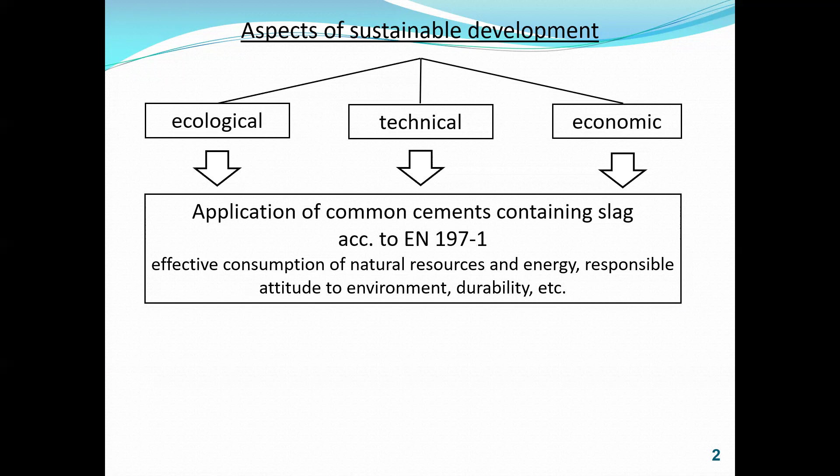The actuality of common cements containing slag implementation is due to their conformity with ecological, economic, and technical aspects of sustainable development concerning efficient consumption of raw materials and energy resources, responsible attitude to the ecology of the environment, durability, etc. The main problem of using common cements containing slag is slowed hydration processes and, as a result, lost early compressive strength. The best solution for activating such cements is alkaline activation.

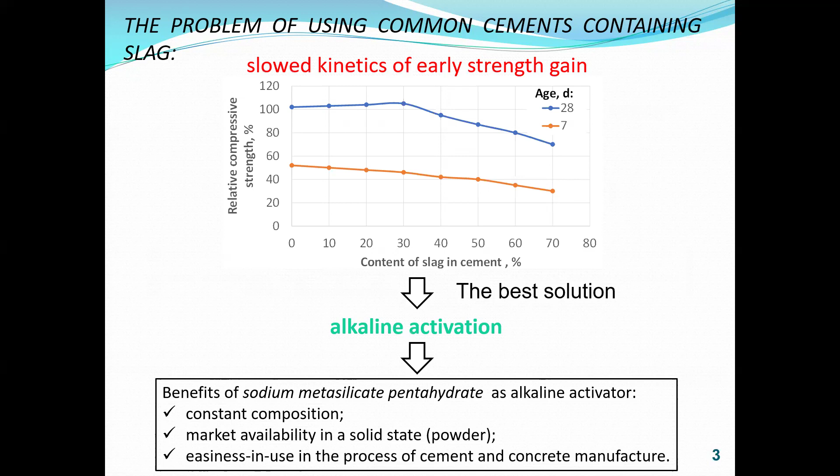Sodium silicates, the anions of which are similar to hydrated initial products of destruction of the alumina-silica-oxygen framework and serve as their additional reserve, are found to be the most effective alkaline activators. The best solution is the use of sodium metasilicate pentahydrate due to its constant composition, market availability in a solid state, and easiness in use in the process of cement and concrete manufacturing. Increased slag content in cement systems and alkaline activation provide formation of more preferable hydration products, cause high strength gain and durability.

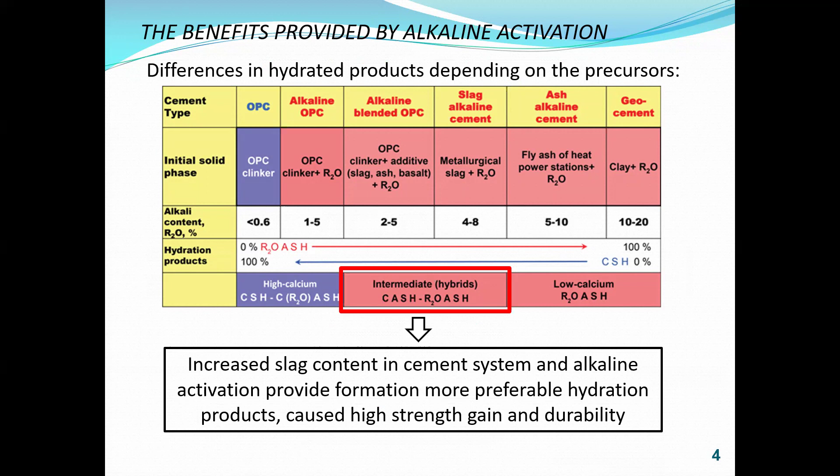The main obstacle in using the alkali-activated common cements containing slag made with sodium metasilicate is a quick setting. The use of setting retarder, effective in alkali-activated cements, for example, sodium lignosulfonate, can be a way to control their structure formation processes. So, the aim of the study was to discover an approach to control the structure formation in alkali-activated common cements containing slag through alkali activation with the help of sodium metasilicate.

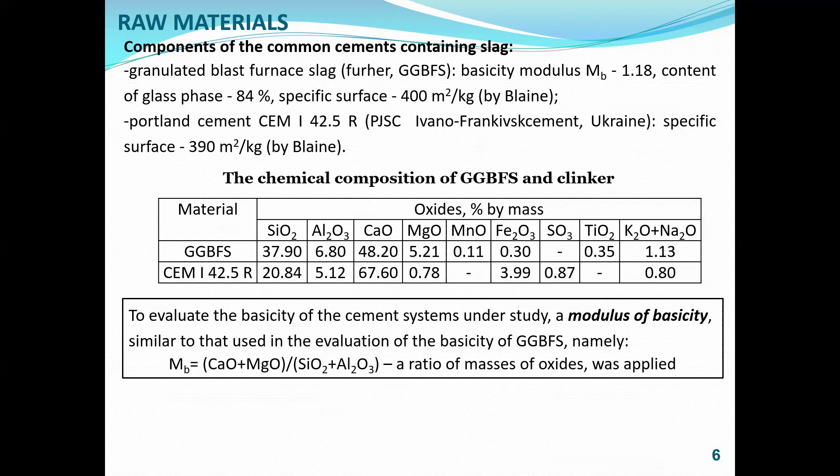Raw materials: granulated blast furnace slag, as well as Portland cement, CEM I 42.5R, were used as basic constituents of the common cements containing slag. To evaluate the basicity of the cement systems under study, a modulus of basicity as a ratio of masses of oxides was applied. Used in the study were three cement systems, the compositions of which are given in the table.

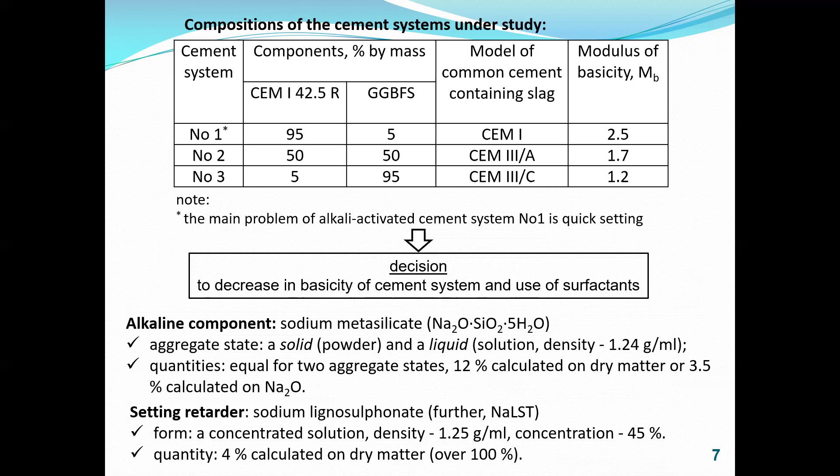Used as an alkaline component was sodium metasilicate in a solid aggregate state and a liquid aggregate state. Sodium metasilicate was added in two aggregate states, both in equal quantities, worth 12% calculated on dry matter. Sodium lignosulfonate was used as a setting retarder in the form of concentrated solution.

Testing techniques. The compressive strength of the cements was determined by EN 196-1 with the following amendment. A water to cement ratio was chosen in such a way that its consistency, evaluated by flow, would be 115 millimeters against a standard water cement ratio of 0.5. The heat of hydration of cement paste was measured using a modified semi-adiabatic calorimetry.

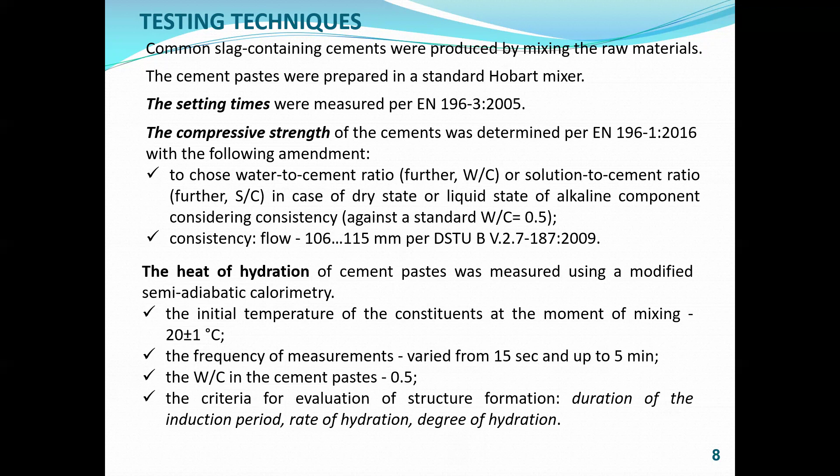The research work was divided into three parts. Task 1: research the influence of basicity of the cement system. Sodium metasilicate was used in solid form. It was shown that with the decrease in the alkali-activated cement system basicity from modulus of basicity 2.5 down to 1.2, the structure formation processes retarded. An increase in the duration of the induction period, as well as a decrease in the degree of hydration, confirm this fact.

Alkali-activated cement system containing 5% of slag is characterized by extremely quick setting times and low strength that correlates with the data concerning the problem of its application. Increase in slag content in the cement system from 5 up to 95% is accompanied by an increase in initial setting times from 8 up to 100 minutes and final setting times from 11 up to 130 minutes. The obtained results correlate well with the data of the thermokinetic analysis.

With increasing the slag content from 5 up to 50, 95%, the compressive strength of the alkali-activated cement systems at an age of 2 days increased from 4 up to 34 MPa. At later ages, with increasing the slag content, the compressive strength also increased at an age of 7 and 28 days, from 9 up to 53 MPa and from 12 up to 65 MPa accordingly.

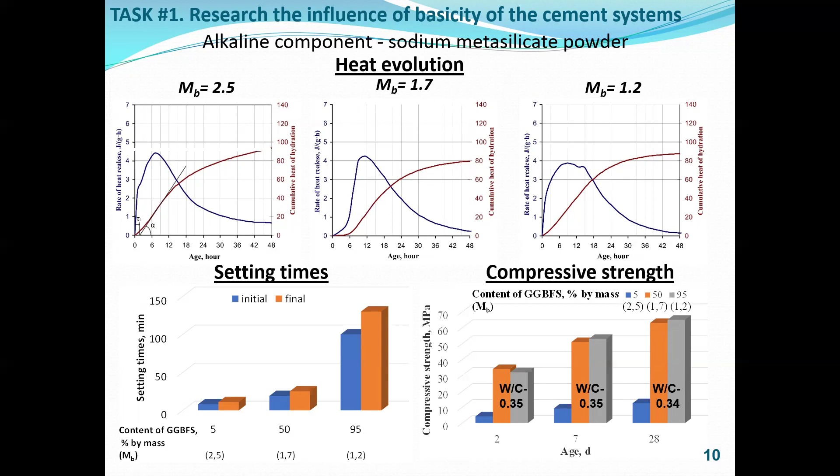Task 2. Research the influence of the aggregate state of sodium metasilicate. The use of sodium metasilicate solution instead of powder ensures intensification of the early structure formation processes due to changes of thermokinetic characteristics. This can be attributed to the fact that in the case of powder, a certain time is required for the dissolution of sodium metasilicate in mixing water and its involvement in structure formation processes. In the case of sodium metasilicate solution, these processes occur and start to develop immediately and with a high intensity.

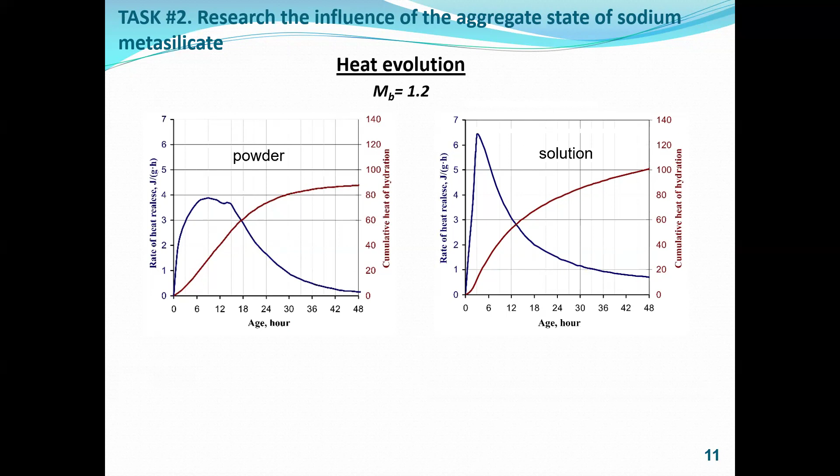The comparison of the setting times of the alkali-activated cement systems made with sodium metasilicate solution and with powders showed the quickest initial setting times in the case of solution, within the range of 1-8 minutes. These initial setting times were too short and could not be accepted for the alkali-activated cement system.

Alkali-activated cement system containing 5% of slag in case of solution is characterized by still lower strength compared with powder. The use of sodium metasilicate solution compared to sodium metasilicate powder resulted in high compressive strength of the cement system containing 50 and 95% of slag at age of 1, 7, and 28 days: 43, 51 MPa, 88, 92 MPa, and 108, 115 MPa accordingly. The obtained results testify to a necessity to decelerate the rate of structure formation in the alkali-activated cement systems for the whole range of contents of the slag constituent made with sodium metasilicate solution to provide acceptable setting times.

Task 3. Research the influence of sodium lignosulfonate on the structure formation. The influence of the sodium lignosulfonate admixture was studied using alkali-activated cement with modulus of basicity 1.2 made with sodium metasilicate solution, taking into account its quick setting. The quantity of sodium lignosulfonate was 4% by mass of the cement. Increase in duration of the induction period as well as decrease in rate of hydration and degree of hydration reflect the retardation of structure formation processes.

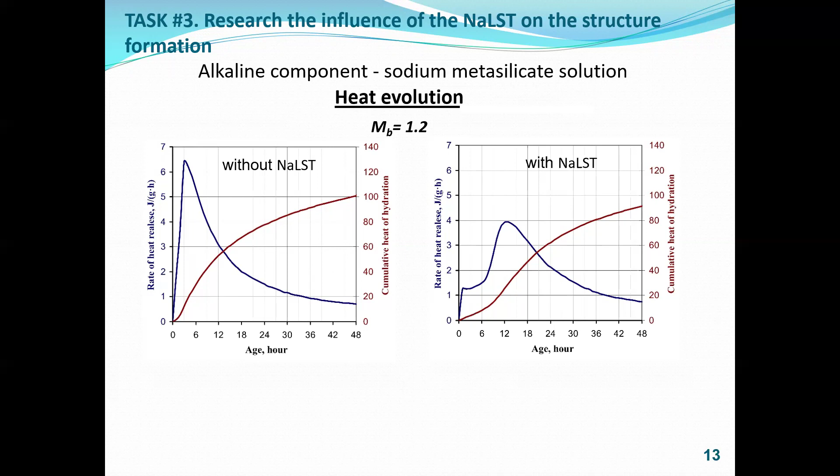With the use of sodium lignosulfonate, the initial setting times of alkali-activated cement systems with modulus of basicity 2.5, 1.7, and 1.2 made with sodium metasilicate solution increase from 1 up to 17 minutes, 4 up to 38 minutes, and 8 up to 60 minutes respectively. The initial setting times of the alkali-activated cement systems with modulus of basicity 1.2 and 1.7 are rather appropriate. The addition of sodium lignosulfonate to the alkali-activated cement system made with sodium metasilicate solution resulted in some decline of the compressive strength compared to the admixture-free cement composition. The strength of the alkali-activated cement system with modulus of basicity 2.5 is still low.

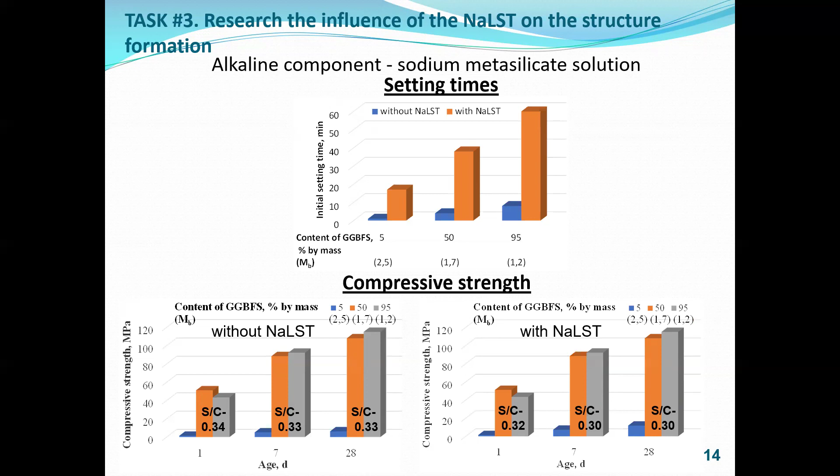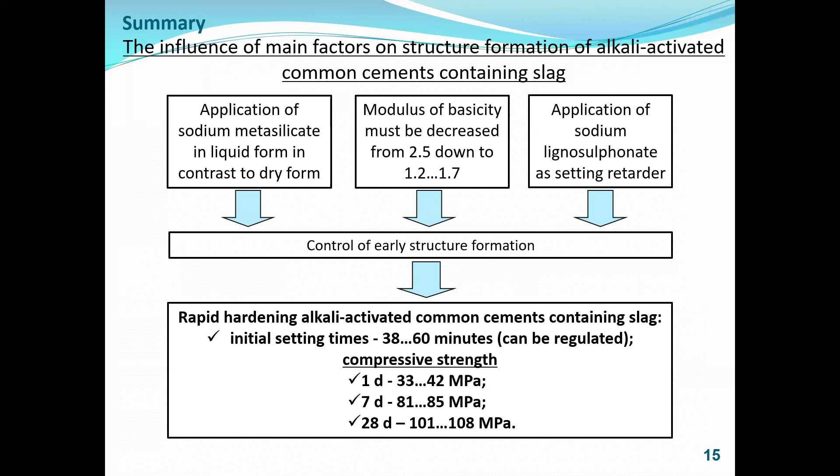Thus, it was revealed that alkaline activation with the help of sodium metasilicate in liquid form, in contrast to dry form, with a necessary decrease in modulus of basicity from 2.5 down to 1.2, 1.7, as well as application of sodium lignosulfonate, a setting retarder, ensures control of early structure formation that resulted in obtaining quick hardening alkali-activated common cements containing slag with regulated initial setting times of 38, 60 minutes and high strength gain similar to that of high alumina cement.